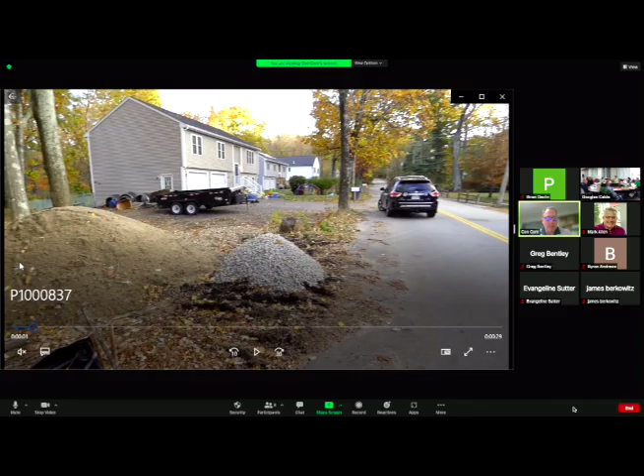So, is my video coming up? Yeah, it did. Okay, so this area to the left, pretty much the order conditions right where the driveway is, was a minimal disturbance. They did some clearing last summer, came in for a violation notice, had 2 or 3 meetings. I think Mr. Stevens is representing the owners of the property. The commission approved a restoration plan for them to pretty much put some seed mix down here and just vegetate back towards normal standard, I think was the intention of the commission. There might have been some discussion on placing a little bit of loam down in some of the areas to help generate the seed. I got a call from one of the neighbors and I went out there, and this is what was being put down, which we wanted to make sure was the intentions of the commission when they approved the restoration plan.

Looks like there's a lot of rubble, a lot of stone.

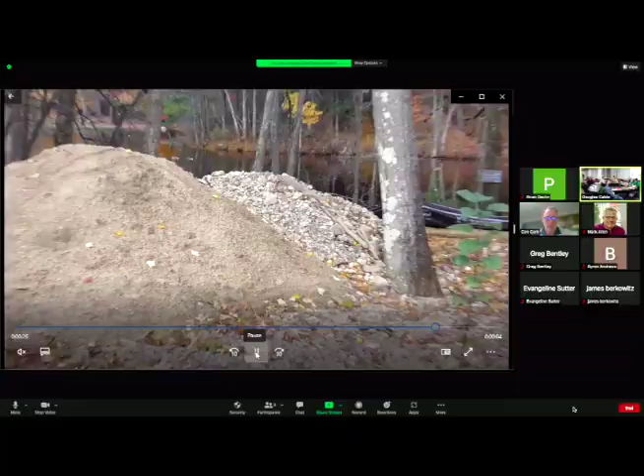So initially, if you could get me up to speed, when the violation occurred, did the board vote for an informal restoration and spec out what they wanted to see, or was it submitted as a plan? No. I can bring the plan up, so let's see. I had agreed to remove some tires and add a third hardwood. Yeah, 3 trees, 3 bushes, and so if Steve goes back to the picture.

What was the material spec to use? So the material we talked about was the loam, and there's loam tailings there because the roughness of it was to flatten out. So I could show you where the area is and the amount that's going to be spread across. It's only... so this is the restoration. Yeah, so explain where the work's to be done.

Basically, you got 50 — I can show you this here. So from the street here to this area here is basically, because of the regrind asphalt, you want to pull that back and get that out of the area, away from the tree area. And because of the disturbance where the trees were removed in this area here, it caused a lot of ruts and stuff like that. So the loam tailings would flatten that across, and then we would spread the loam so it would only be about 2 to 2.5 inches thick, to be able to support the recommended seed that they wanted to use.

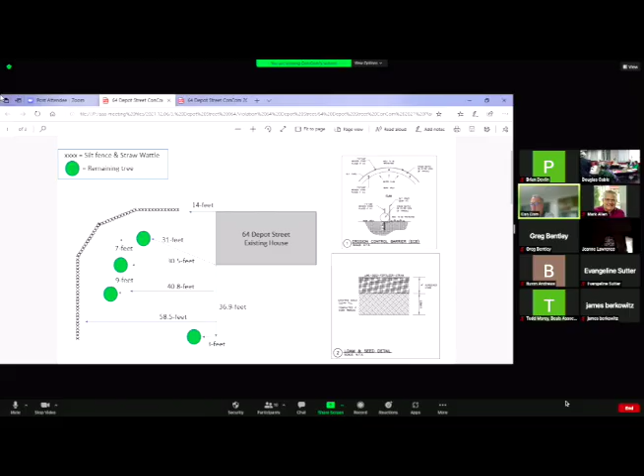We're bringing the loam to top the loam across. So it's about 2.5 inches at the end of the day.

So Mark, what was your understanding of the restoration scope? I don't think you were present. I was not present, but I've seen the plans. I was not present for the presentation. From my review of the plans, what was approved, I did not see that there was to be imported material such as what he just explained.

What do you call it? It's loam and loam tailings. And what is the gravel pile that's there as well? That's loam. No, there were 3 piles there. The other one is crushed stone that you use along the roadside berm, so you don't have any disturbance, because you try to stop any material going across there. Town uses it in areas where you're blending in from the pavement to the property. So that's all that is.

So I'm just trying to address this. If you don't want the loam tailings in there, I can spread the loam there and remove the tailings. I'm just trying to preserve, because there was a lot of divots and ruts that were done, and the material is really going between the street and to the trees to the house.

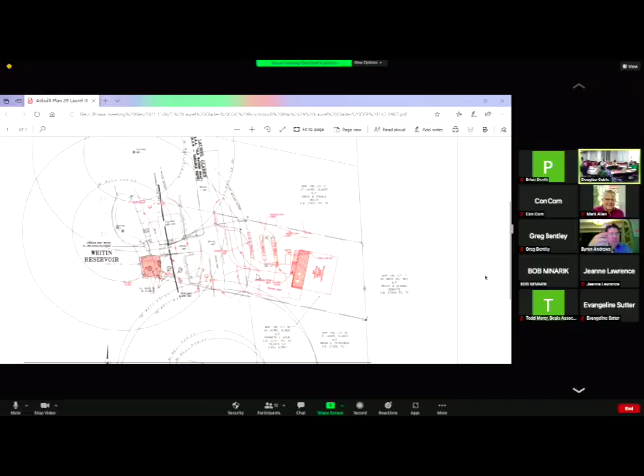I gotta find this one. I don't have anything in my file. Steve, do we have anything in our file for this, or is it just online? He's muted again. This is painful. Is this like this the whole time? Been gone for a little while. I'm sorry, we didn't have red lines before, so this is new.

So what would you like, Tracy, would you like the file? There was the as-built plan submitted, the request for the certificate, the engineer letter of substantial compliance, everything was submitted. All that stuff is on the screen - the original as-built, they submitted this probably about 3 months ago. Went out, took photos, showed it at the last meeting. The issue with the as-built is that they had this as-built in red, as you see on my screen, but they did not have the proposed plan underneath. So there were some questions, and I think Mark had concerns with the septic system and how it met with the Laurel Glades in the road and whatnot. So we were waiting for the correct as-built plan that showed the proposed plan with the red line on top.

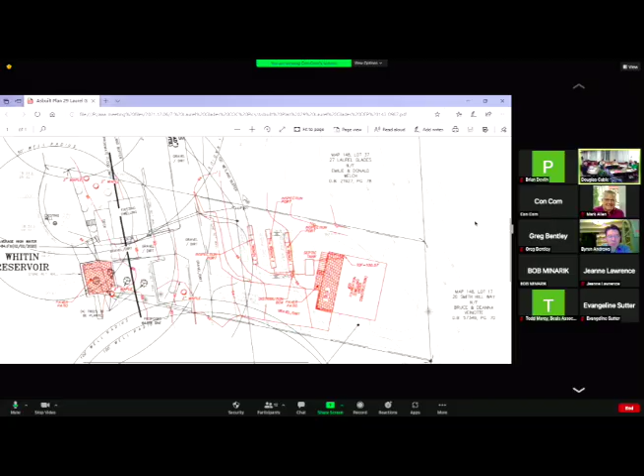Okay, so this revised plan satisfies the board's concerns in terms of what we were looking for in a plan? Yes, and it's been substantially compliant with the proposed. I mean, the house is in the exact location, the septic's approximately, the grading is close enough, the trees are close enough. Everything's stable? The paver stands out - the original plan didn't have a paved patio. Is that within the 100? Yeah, the water's right here. Oh, that's water.

So was that additional work done outside the scope of the order? Byron? Yes, the original plan did not show that paved patio, so since the original order references the plan, I believe that was not part of the notice of intent approval. Are those permeable pavers? Because you said paving, but it says paver patio.

There's supposed to be 4 trees to be planted. I'm Brian Devlin, owner of the property here, 29 Laurel Glades. Those pavers are just regular Unilock pavers that we put down. Those were put down due to the ground being disturbed when we removed the existing building that was there. So we wanted to reclaim that ground, and so we put pavers down.

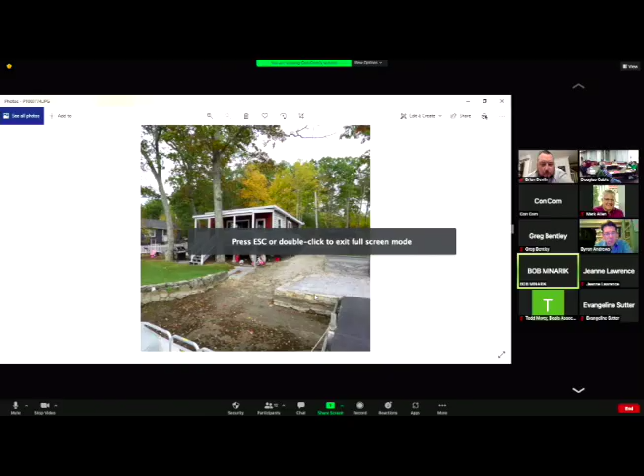I mean, this is behind a retaining wall. There was a picture of it right here. Do you see the structure that was taken down, where the pavers are? It was a previous shed that was there. So they have not increased the impervious surface because they were building there before. Okay.

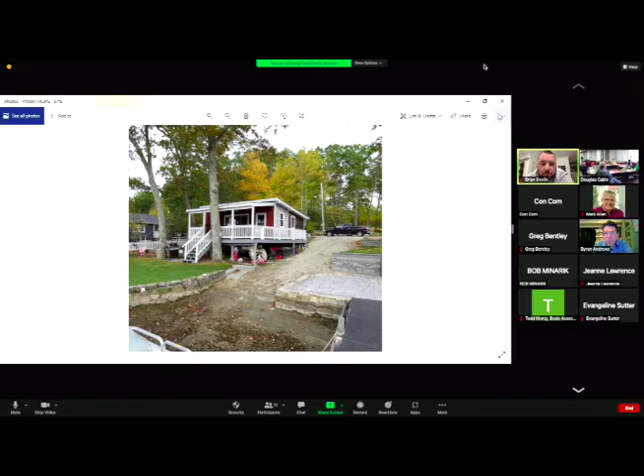Board, do we have any issues with this request? Well, what was proposed for that area? 4 trees? They were gonna put 2 trees there, and they ended up putting the trees elsewhere. We put 2 trees on the right-hand side of the property and then 2 on the left. So they ended up putting them across the lawn, and they put pavers there instead. That's not in compliance. It's not what was on the plan, it's not in compliance, in my opinion.

So, is this order expired? Steve? I don't think you were expired. Can you mute that, please? I think it's Bob. Thank you. Let's see.

Also, why 2019? December of '19. Did they ask for an extension? Oh, it's only been 2 years. They're asking for a certificate of compliance. It's 2021 still. Okay, so I guess we want to determine if...

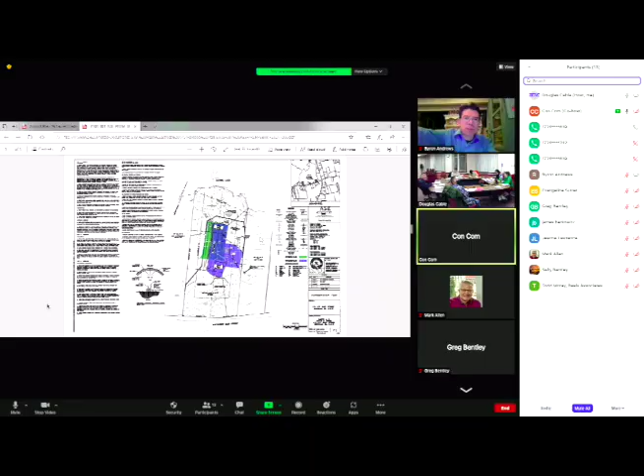Oh, I saw that. Maybe this is the plan from today. Yeah, it shows the wetlands to the left and to the right. No, I don't mind at all, but I have to make sure it's on the right screen. It is.

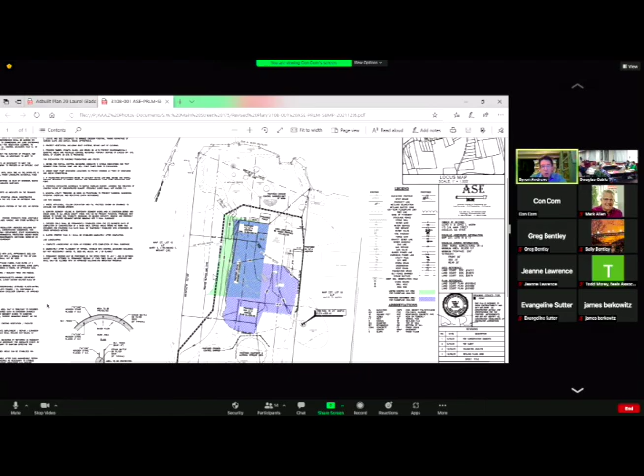Byron, you want to walk through what's going on? Sure. Following our previous site visit, we discussed the idea that the area shown here in green, and actually a little further out from that as well, had been excavated when Mr. Moran put his yard in. You can really see that, really picture it when you're standing there and seeing the steep banking to the left where the pine tree grove is.

So we did two things to the plan. We estimated the volume of fill that was removed, shown in green, starting at the top of the knoll and coming down at an even grade to the corner of the foundation. In point of fact, it was probably more that was removed, but we wanted to be conservative in our estimate, so we estimated that volume to be about 159 cubic yards.

The second thing we did is we brought down the elevation of the garage floor from 503.5 to 500.5, lowering it 3 feet, which removed a lot of the fill we had designed to put in there. The only other change to the design is a small swale to the left of the garage, to provide stormwater flow around the garage so it doesn't run into it. When we did that, we found that what had theoretically been removed was 159 cubic yards, and what we brought in is 149 cubic yards. So actually this layout has 10 cubic yards more storage than we believe was present before the yard was graded out.

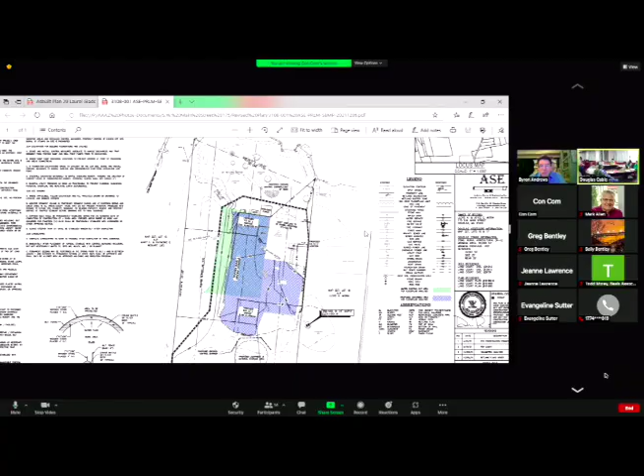Okay, this is a public hearing. Anyone in the audience or online have any comments or questions regarding this filing? Not seeing any, I'll entertain a motion to close the hearing.

So moved, seconded. Made by Art, second by Katie Grace. Roll call vote: Eric Harris, aye. Art Monmany, aye. Mike Rocco, aye. Mark Mungimai, aye. KG Dudley, aye. Okay, I'll entertain a motion to issue the order of conditions.

I'll make a motion that we issue the order of conditions based on the newly updated plan for 175 Southwest Main, which should satisfy the floodplain restoration. Okay, motion's made.

Seconded by Katie Grace, roll call vote. Eric Harris, aye. Art Monmany, aye. Mike Greco, aye. Mark Mangum, KG Dudley, aye. Okay, thank you very much, good luck.

Steve, you'll have that for us to sign? Next meeting. Okay, thank you very much. Okay.

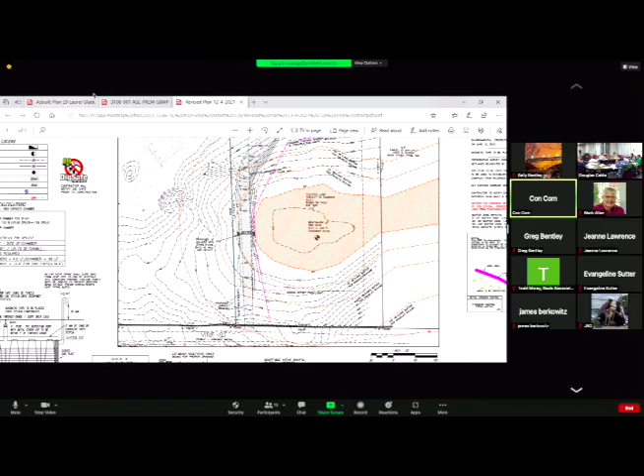It's obvious that it was jurisdictional, and the buffers are on the plan. And if -- they're not going to build another house.

I think not clearing, so that's all vegetated, right? Mature trees. Correct. Right, so I think in this case there's a clear limit that's sufficient.

But yeah, like, that's why we asked the question, right? It doesn't really say -- I mean, the construction limit comes to the silt fence, and then there's a silt fence line. It doesn't say that that's the construction limit.

I do, right along here, I have an erosion control barrier. And construction, in wording -- it does say it in wording, I'm sorry. Yeah, that's cool, okay, thank you.

Sorry to slow us down. No, that's okay. I like the colors.

Board, anything else? I'll entertain a motion to close the hearing. So moved. Seconded. Motion made by Art, second by Katie Grace.

All those in favor? Eric Harris, aye. Art Monmany, aye. Mike Rocco, aye. Mark Mangumai, aye. KG Dudley, aye.

Okay, I'll entertain a motion for local bylaw only order of conditions, for the issuance. Go for it. I'll move to issue an order of conditions for 128 Vine Street by local bylaw only, per the plan that we have here, with a regular order of conditions.

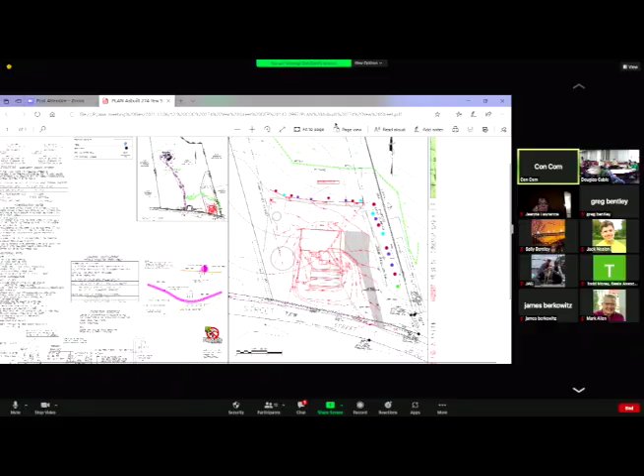Wait, can you see it? Yes. I like that deck better. Probably the wood.

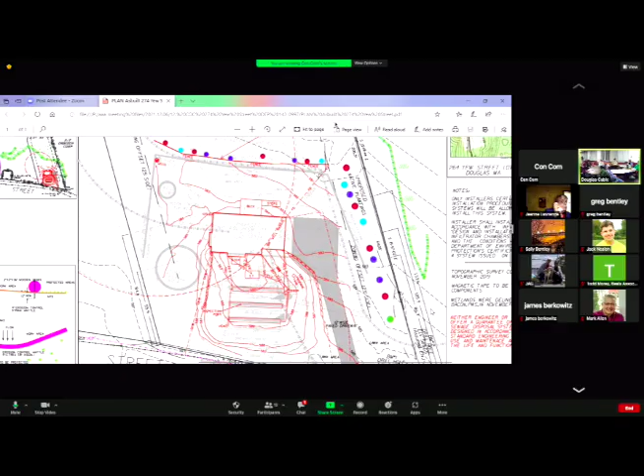Okay board, anyone want to, I'll say a motion to issue the certificate of compliance. So moved, motion made by Art, seconded by Katie Grace. Roll call vote. Eric Harris, aye. Art Monmany, aye. Mike Greco, aye. Mark Monjamai. KG Dudley, aye. Okay, thank you.

Are we here for Cedar Street also? Yes, wow, yes, you're busy. Okay, next, a request for a certificate of compliance, 76 Cedar Street.

Steve, if you could pull up that as-built plan. This is one of those jobs that was done quite a while ago. Yeah, we're doing some cleaning. Right, they need the certificate. Yeah, about 90 orders ago. Right, quite a while ago. Steve, could you please pull up 76 Cedar? Oh, thank you.

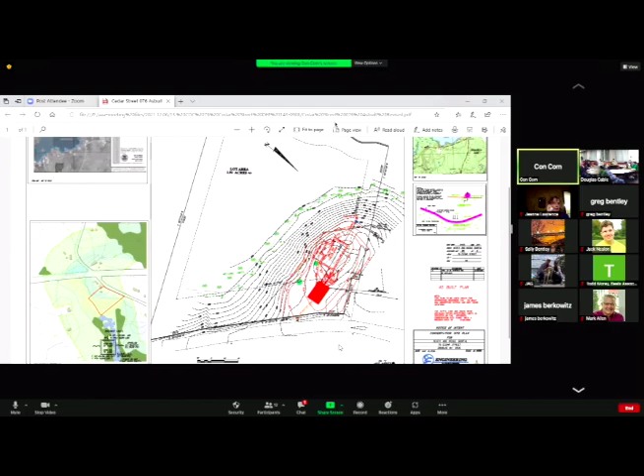Do you have any revisions to the original approved order plan? Anything out of compliance? No, pretty much the house went right where it was supposed to go, and they stayed within the confines of the erosion control that was installed, so the well got moved just a couple of feet, but that's about it. Farther away from the resource area? Yeah, further away from the house.

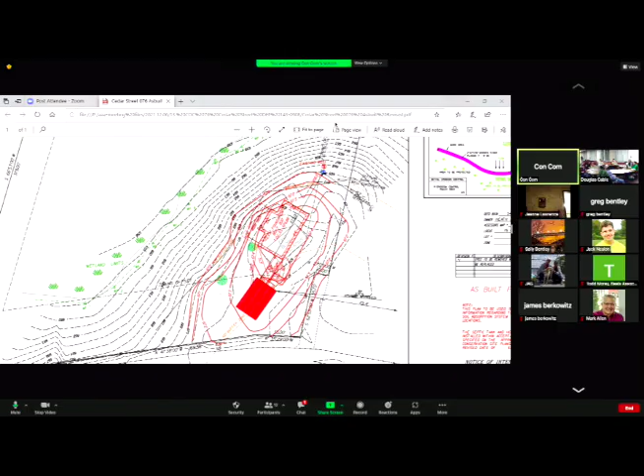And everything's stabilized, what year was this? Oh geez, the foundation says it was from 2017. That sounds about right. Built so everything's grass. It just says existing foundation built 2017.

Board, any questions, concerns? Entertain a motion to issue the certificate of compliance. So moved, motion's made by Art, seconded by Mike. Roll call vote. Eric Harris, aye. Art Pompey, aye. Mike Greco, aye. Mark Monjamai.

I'm still looking at it, sorry. Okay, that's just fine. You don't need a vote, you got enough votes. This is technically, alright then I'm abstaining, and it's only because I didn't look at it long enough. Okay, alright, that's fine for the record. Okay, yep, thank you.

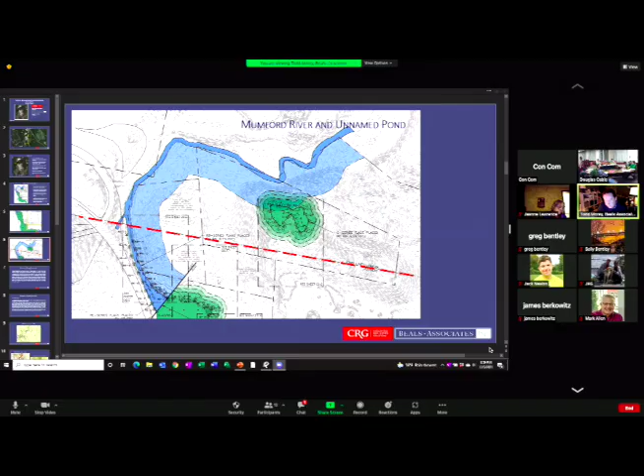And again, this just zooms in on the unnamed pond that I mentioned, on the small area. One of the things we run into frequently is when we have pretty well-established rivers that run into these ponded areas, especially ponds that have man-made dams at the end of them, there's a lot of discussion we end up having: is it a pond, is it a river, and what really is the difference? So we've included this language, as well as the next slide, in the application book.

But really, the things that we look at to figure out whether this river turned into a pond or not is, first of all, is there an impoundment that's at least 10,000 square feet. The Gilboa Pond, through the years, depending on which set of mapping you measured off of, runs anywhere from about 12 acres up to 15 acres, again depending on the source of your mapping.

There is a man-made impoundment at the northeasterly end. The dam is there, I'm sure most if not all of you are familiar with that area. Currently, the way the river appears to come into it, comes into roughly this area here. This is the area we've shown as a pond, and our flagging starts right here. Whether this end may be part of the river and future riverine characteristics, it could be.

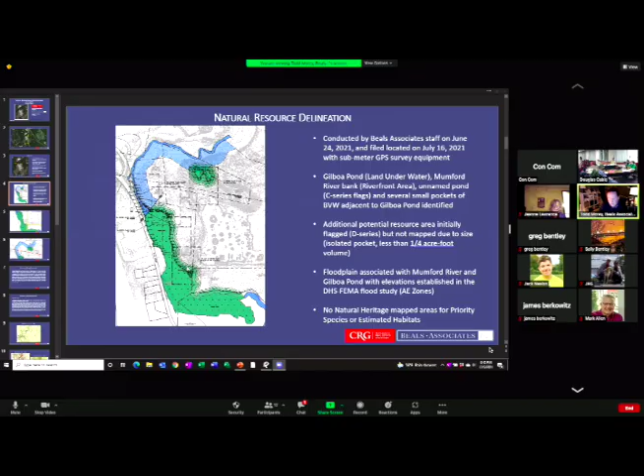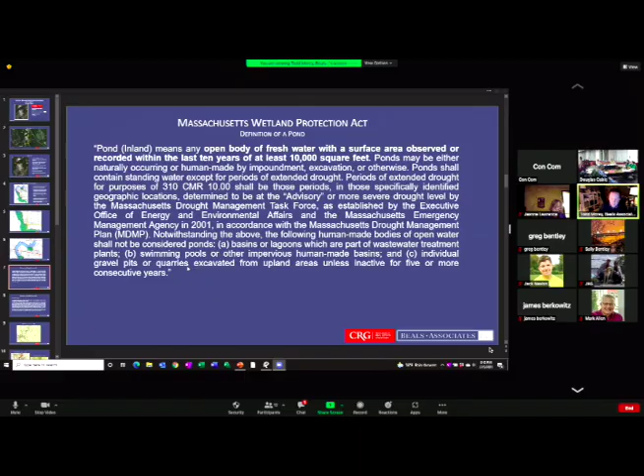So getting back to these definitions, we have well over 10,000 square feet of a water body. We have a man-made impoundment, meeting the definition of a pond. We also look at definitions of rivers, riverfront areas, things like that. One thing that pops out in the riverfront area definition is that if you look at the USGS map, it identifies it as a pond, so your initial response would be it's a pond. However, the authority having jurisdiction, the Conservation Commission, if you go out there and determine it has riverine characteristics, you can override that. You can call Gilboa Pond part of the Mumford River if you see the riverine characteristics out there.

I'm assuming Mr. Allen will look at it at your direction. I'm hoping some of you go out and look at it, if not all of you. I think the board will independently go take a peek at all the flags, but we will want to hear from Art what his opinion is on that pond area.

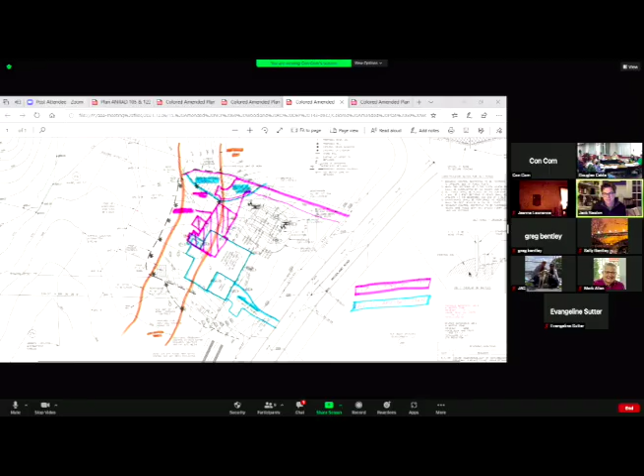I like it. Move the house location forward and swap the driveway on the other side of the lot. And your proposed grading, is this coming up? This is the approved plan. Yep, that's up. Got the driveway on the right.

Could you zoom in a little bit more, please? Jack, did you revise the grading on the proposed revision, or did you keep the same grading? No, we revised the grading on the left-hand side of the driveway. Yeah, it doesn't look like it. When the driveway comes in on the left-hand side, there's grading on the left-hand side.

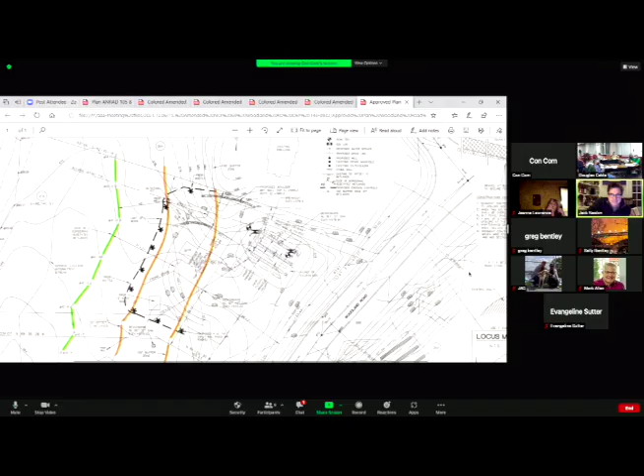Doesn't this look the same as up there? So this is the old plan, obviously, with the driveway coming all the way down the right around the system, and it's the garage. Okay. No, that one's way more curvaceous.

Did you move the limited disturbance forward? Yeah, so on that far back side of the previous one, we're not gonna be doing anything out there, so we're gonna pull the erosion control forward, and let that area, we've already cut it due to the initial plan, go back completely naturally. This is talking about that - they cut back to here, but they don't need it, so they're gonna let it grow back to here.

And this is separate because there's the well and the siltation. Okay, so they're gonna give us back this. Yeah, this is all too small for me to see. I have this zoomed out, I can't make head or tails out of this. Steve, do you have full-size copies that I can come grab, or you can bring us?

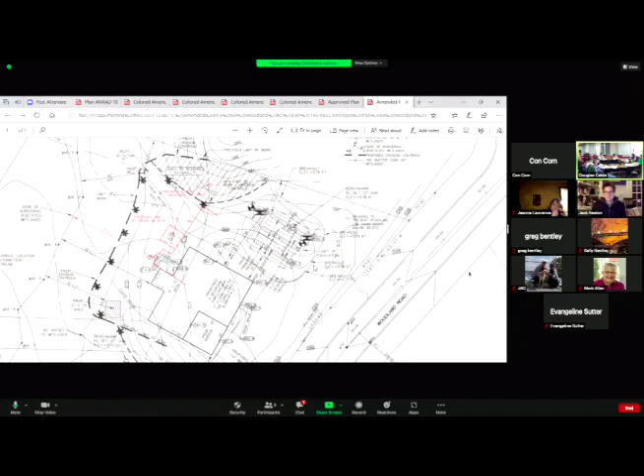The shading is hiding whatever is written underneath it on these. Yeah, that's true, so I would ignore the blue at the top on the north side. Although it does say area to restore naturally in the left box, and the right box says new limit of work, erosion controls.

So that actually was not part of the amended plan? That's a new addition. Oh, it is a new addition? Right, they had cleared that, and they're gonna let it restore because the new plan doesn't require that area to be cleared, but they already did it. Okay, it's going to be a change. Right, yes, okay, so that section is changing.

And then the house is moving. Yeah, I can see where the proposed four-bedroom house is, right at the setback lines. Yep.

Oh, here's my hero. Thank you, art needs one. Can you grab that notice for 32 Cottage? You could also send it to me electronically, you don't want to walk it. We emailed each other. Oh okay, all right, helpful.

Okay, so you reduced 27%. What other items? If you could just run the list of the amendments. So the house used to be 71 feet off the vegetated wetlands. Now the house is going to be 79 feet away. The driveway obviously shortens, probably less than half, and comes right in off the road. The proposed house we're looking to build is a ranch, that's why the house comes bigger, but obviously totally out of the buffer zone.

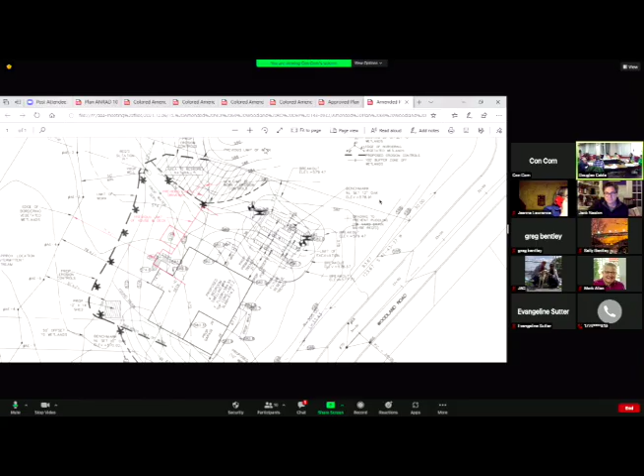Eric, questions? No, all right, I can see what I'm looking at now. No, an improvement, I think the driveway is better on this side for sure. Even though it was outside of the 100 anyway the last time. So let's focus on the restoration, so the well's in the same location. The house portion, 50% of the old house was within the 100, now it's probably like 15 to 20%. 20%, yeah, and that's it. So if we're looking at just within the 100, we've moved the limit of work up a little bit.

Mike, anything, questions? Mark: couple things, is there a way the shed could be shifted so it's further from the wetland, at the 50-foot line? The proposed 12-foot by 14-foot shed, is there any way that could go on the right side, where the other house used to be? Put it over here, Jack? I think we'd be willing to do that. It's gonna look pretty awkward until the area grows back, it'll be kind of a shed built in the middle of the backyard.

What is the shed on? It's going to be stone? It'll be stone and timbers and the shed on top of it. So you're really digging down, say 6 inches, and putting a bed of stone that's pervious? Certainly. And that area's already been cleared, on that side? Yeah, the whole limit of work has been cleared. So it's blacked out. Yeah. I'm okay because it's already been cleared. Yeah, me too.

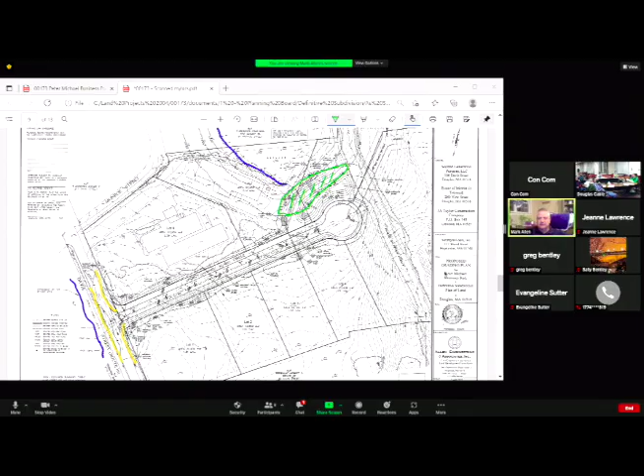All right. Thank you, thank you, I appreciate it. All right.

So this is a public hearing. Do we have any comments or questions from the public on this site? Or if you have any other items to discuss, go ahead. Otherwise I'll entertain a motion to close the public hearing.

I was at the site a couple days ago, and it looked fine to me. Thank you.

All right, so then we can issue... what are we issuing this time? Sorry, I've forgotten my entire, what I do here. Well...

Someone has to make a motion to approve the notice of intent, notice of intent with conditions. And I don't think we have any conditions, this is just our normal conditions.

Okay, I was just verifying that this is a plan, not just an ANRAD.

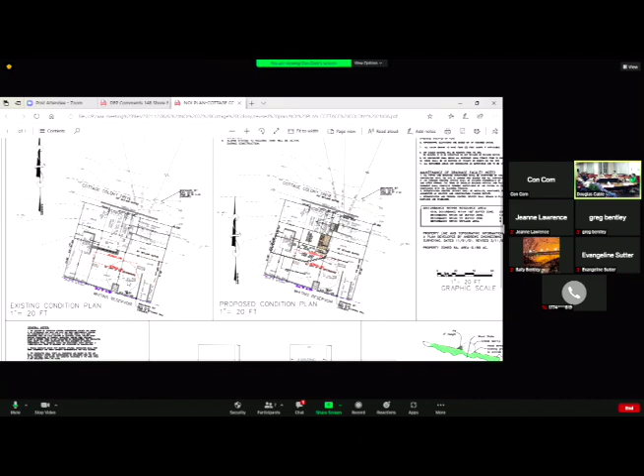Steve, did you, oh, you do have it, yep. So this was at the last meeting. The big issue was the existing shed. The proposal he had before the revised plan was moving it further away but closer to the property line, and that was a zoning violation, so I think he's not touching the shed now. Steve, if you don't have it, I sent you a newer set—Bill Drexel did a newer set. Effectively we understood that you didn't want the shed moved, so he did a new set, which I thought got emailed to your office. This is it right here. And we're not moving the shed. No. Right, so this plan shows it not being moved. Oh good, I thought you were saying it was being moved. I was gonna say, the previous plan... okay, that they saw last time. I can't see that far. No. None of us can, for a long time.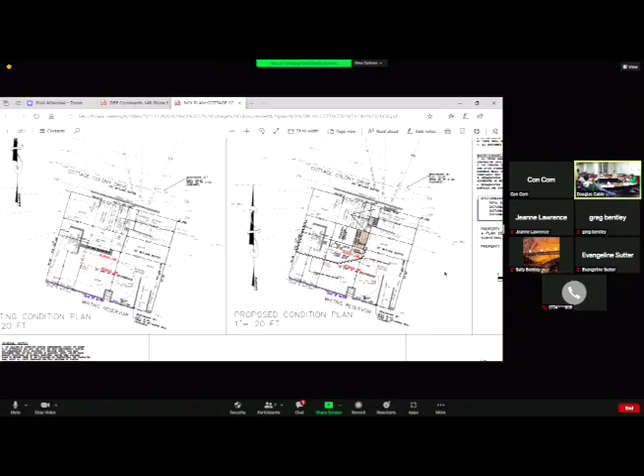Let me see if I can bring up the video. So this is the existing house.

You don't have to do anything with the septic as part of this project, do you? No, that's about it, it's just the house. Same footprint? Yes, there's a nice little diagram on the plan that shows the addition being exactly the same footprint as the little porch.

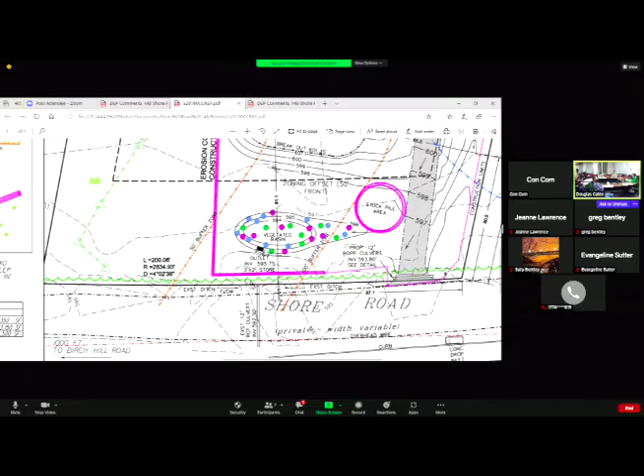So this is in an area that was previously outside of your construction limits, that you've expanded the construction area to create this vegetated basin. Correct. What does the space look like currently right there? Is it just wooded? Wooded.

I like the vegetated basin, I'm just nervous about the tree removal. Well, I can leave some of those trees in there. The septic is there and there's room to leave some trees there.

I would just encourage you to leave as many of the trees in that area as possible, because I don't want to lose any of those trees to put in the basin. If you could even move the basin a little bit closer, because that stockpile area won't be there forever, it's just temporary. If you could move that vegetated basin even a little closer -- I understand it matches your topo lines really nicely the way it is, so I don't want you to have to move it too much.

Sure, I can tweak that a little. But if you could tuck it in a little closer to where the stockpile is, since that's already a disturbed area. Yep, again I'm just trying to limit the number. Without a site walk, I can't tell you which trees could stay or go, so I have to leave that up to your judgment. I'll just make it a little more compact, keep it over next to the driveway. Okay, great.

All right, so I think that addresses that comment. Because we're trying to make it not just flow right over the road into the lake. And looking at your topo lines on the driveway, the pitch towards the road is greater than the pitch towards the detention basin. So is there a way you can put a bump in the driveway or something to better direct that water towards the vegetated basin? It seems to me like it's just going to want to keep coming down the driveway instead of turning and going off.

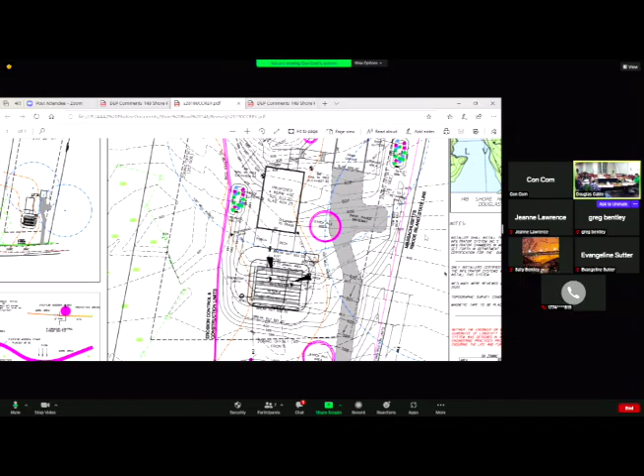Did you do any calculations as to the coefficient of runoff and what the increase in runoff is going to be? Yes, I did. What I did is, the existing area - that's just the area we're disturbing - I have the existing area, which right now is wooded, and then that same area I did the changes for, so the woods is going to get changed to impervious area, roof, driveway, and lawn. So I did do calculations, and up to the 25-year storm event, those basins actually reduce the amount of water that's coming off of there now.

But when you get into a bigger storm than that, you don't really have enough room. These stormwater designs and calculations weren't really meant for these single-family lots - they're meant for the bigger subdivisions. So for the 25-year storm, it appears to work. And what I also like to do with stormwater is try to break it up - so I have the roof runoff going to 2 separate little basins, and the driveway going to the other basin down at the bottom. So you're distributing it, spreading it out. That's right, yeah.

What's the elevation of groundwater in the areas of these basins? About 3 feet, and so I have about 2 feet above. You're going to get a little infiltration, but you have to work with what you have there.

What's the area of disturbance? Area of clearing of the site? Let's see, I got the buffer zone disturbance, which is about... That's good, that's about half the site. So the total buffer zone is 14,500 square feet. Within the 50-foot buffer zone, I have about 1,300. Okay. Yeah, again, just trying to shrink that as much as possible. So actually the runoff area is, by my calculations, 26,500 square feet.

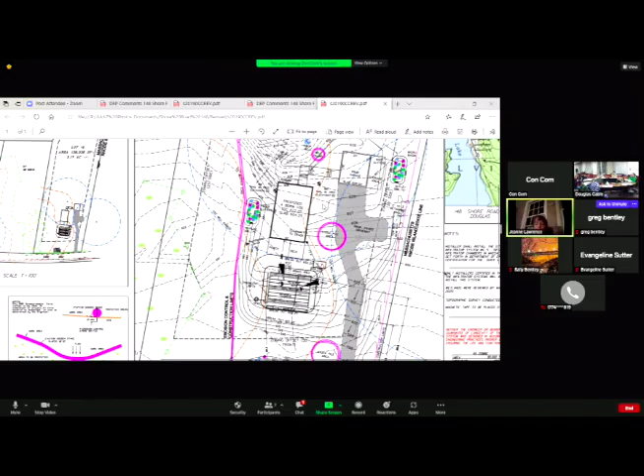Yeah, we can hope, but we've been tracking the site since after they put the solar farm in, so you're aware. Where this house is going is high and dry, but on the left-hand side there's that wetland, that's where a lot of the water from up on the hill comes down, through there. But the house and where the septic's going is pretty high up, don't worry about that getting wet. Thank you. Certainly.

Greg Bentley, name and address? Greg Bentley, 119 Shore Road. Just to follow up on Jeanne's question, it looks like the grade of that driveway certainly probably wants to be paved, but is there any chance of grass pavers up closer to the garage in that hammerhead turnaround area? That doesn't look like it's graded too steeply, I was just wondering.

Do you ever utilize any grass pavers or porous asphalts or any of those things? I have when I've done jobs for boat ramps and things like that, going right down into the lakes, I've used them. But not on driveways, because a lot of times regular maintenance, plowing and things like that - so for boat ramps I have.

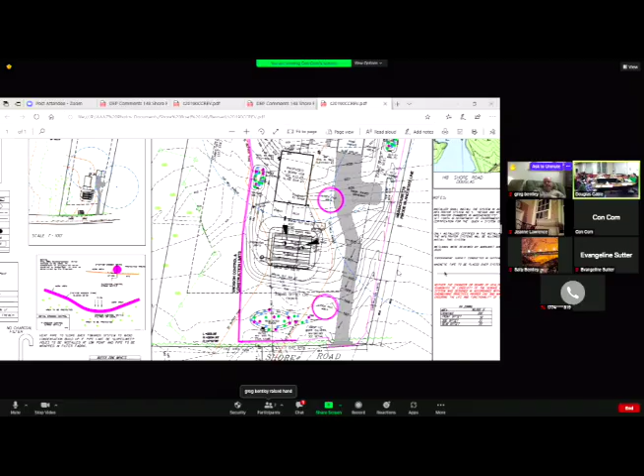All right, thank you. I think with the other mitigations we have, we can make this work.

Any other comments from the public on this site? Any comments from the board on this site? Anyone here on this one? Otherwise, I will entertain a motion.

So I'll ask the question, do we want to hold off, do we want to continue this until we've seen a revised plan? Yes, I would. All right, then I will entertain the motion for a continuance.

I would motion - making sure, does January... what's our next meeting? January 3rd, but I think we're going to get into the same situation as this - you think we're going to be too busy on the 3rd? Yeah, this is way too many we've got now. All right, well nobody's going to do anything in the winter. Probably not, so you're okay with January 24th? Okay, all right, I'll entertain the motion.

I move to continue 148 Shore Road - was that the right number? Yes, 148 Shore Road to January 24th, 2022 at 7 PM. Second. Motion made by Art, seconded by Mike.

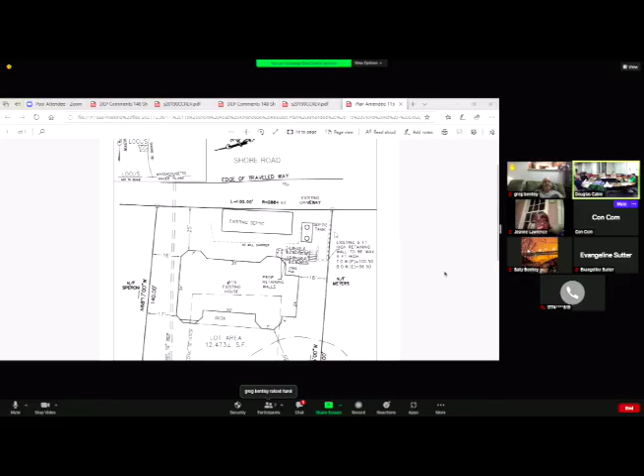Okay, and the house actually is smaller than what was proposed before. Is the plan you had it out, is that a red line plan? Yes. It's not the original plan. Okay, yes, this is the existing house, what was built, which is smaller.

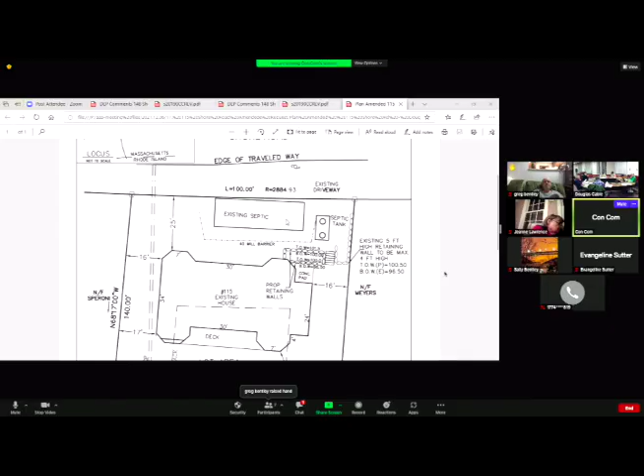Do we have a copy of the notice of intent? Is that what you have on the screen? This is what he submitted as the as-built for his proposed changes. Yes, you want to see the approved plan? Yeah, because the changes aren't clear to me. I'd really like to see a red line.

So basically, all the contours on the plan that were proposed, the wall is just to eliminate all the proposed contours, which is a 3-to-1 slope. I believe this is it. So that area on the left-hand side, all this slope on the left-hand side of the house - we're eliminating all that, pulling all the grading back toward the front of the house, and keeping the wall that was put in place to protect the septic.

So we believe that's just an improvement to the site, not... The wall is already in place? Yeah, there is a wall in place. But this one's going to be shorter, right? It's going to be not as tall? Yes, exactly. You're going from 5 feet to 4 feet? Exactly, yeah.

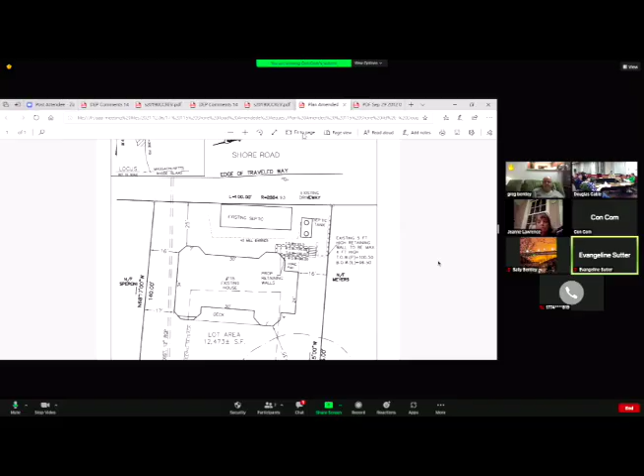In response to that one, I would like to see on the plan with the red lines, I would want to see your topographic lines on the updated plan. I mean, the grading would actually be an improvement because we're not grading toward the neighbor. Yeah, I see. No, I appreciate that. That's good. I want to see those things. Right, for sure.

Name and address again? Greg Bentley, PE, 119 Shore Road. I got a few, and I know it's late, so I'll just be quick.

We don't feel it's appropriate at all for an amendment. We feel that it should be a new NOI. We definitely agree with Madeline. We just saw a beautiful example down the street of grading to maintain water on a proposed property. This original plan had grading on it between the 117 and 115 property line, between the house and the property line. This one does not. I've seen it with my own eyes. I think I know why, because that water's all going towards 117. So they need to regrade that, get a swale in there or something.

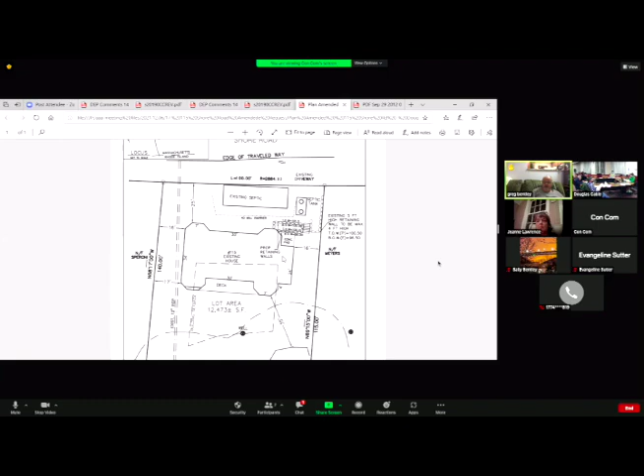The original plans, as we understood it, even the revised plan still calls for, quote, existing 12-inch RCP, reinforced concrete pipe going through the property, and it shows it going across the street and through the property to the outlet at the lake. We now know that that's an 8-inch pipe across the street, and we have heard lots of discussion that it's probably not fully functioning through the property. That was, as I understand it, one of the requirements to maintain that existing drainage path. It's been compromised, and we have a history of the last 6 to 8 months of it going over the road and tearing people's stuff apart. So that has not yet been corrected.

I know we got the wild card of the solar farm, but that pipe through that property, the historic drainage path, has not been reestablished, and we want to know when and how that's going to happen. Right now, when it overflows, it's heading south towards Rhode Island, and it's moving across the front of 117 and 119, and it's coming in greater quantities through the basement of 119, causing damages and threatening to cause many more in the winter.

So it's also probably going to kill the trees on the east side of the road, heading down towards the state line, and possibly threaten that other plan we just looked at. Something has to be done to make sure that new water path heading along the east side is changed and gotten rid of. That's probably going to increase the number of wetlands on the other side of the road, by the way, so somebody else is getting hurt.

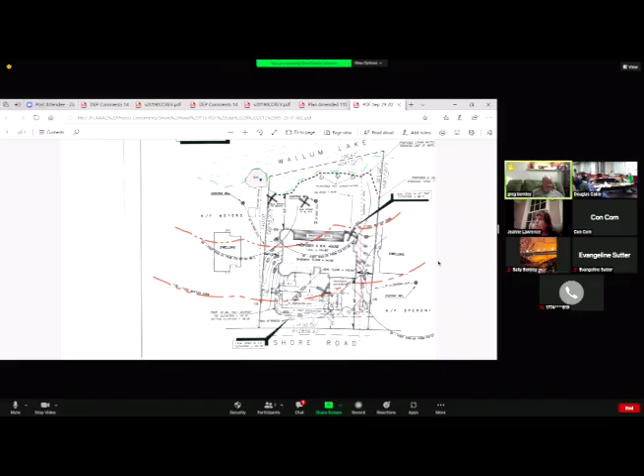We're curious as to why a wall was built before the plan was submitted and approved, but that's just a discussion for another day, maybe. I don't know. No, I mean, that's something that happens sometimes in these construction sequences, and I hear your concerns for the surrounding properties and areas.

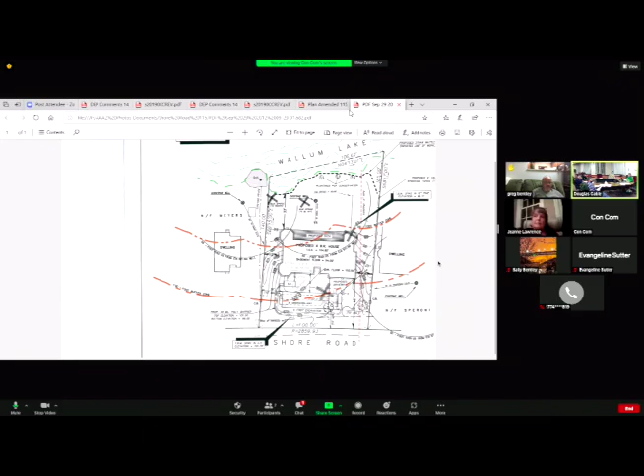Okay, we understood that Graves Engineering was doing the peer review up on the hill for the solar farm for both boards, and we're wondering what their findings were. I know that's not germane to this, but definitely tied in. And the DEP site-visited the whole thing. We haven't heard anything back. At least I haven't been able to find anything back from them. Nope, if they made any comment or. We have not either.

Our other big concern at 119 is that the original approvals also called for the grade of the road to be maintained. What's happened now is property owners graded the road higher to protect 115, and it may lessen the problem at 117 that occurred last year. We don't know, but we strongly suspect it's going to increase the problem at 119, and when the big one comes over the road, we think we're going to be the lucky losers at this point in time. I don't know if anybody's actually surveyed that regraded road, but we would hope that could be part of any revised plan that's going to be considered, because we need to know where the low points on this road are. We know we've had failing culverts in the past.

And, you know, that's a fairly simple and easy thing to do. I would hope somebody's going to do that, because right now, if that fails, it's not going to Meyers, and it might not go to Madeline, but it's going to come to us if it doesn't. It's either going to get us or our neighbor on the other side. It's going to get one of us. And I'd like to know how that is. And then just the last thing I have is one quick question. Do we know if the certificate of compliance has been issued by the planning board for the solar farm yet, or is that still in play?